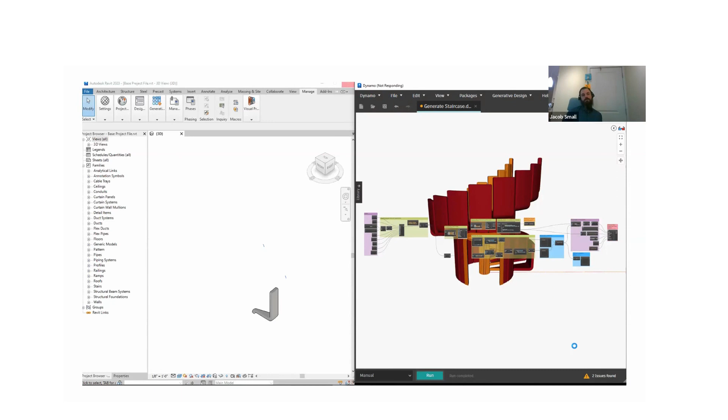All right, so last time on Dynamo Office Hours we built a crazy stair. This is an animation that holds the deck that basically shows how it was intended to work. You can see the graph over on the right—we set it up to drive all the math required to build all the different shapes and get the individual treads pushed over into Revit automatically.

I actually recorded this while filling up a cup of coffee, believe it or not. It was one of those things where you hit run, walk away, come back, and hopefully things are looking better—and in fact they were. So in this case, Jacob, you don't want to walk away because you get to see this awesome animation happening right in front of your eyes. That is true, that is true.

Now I will spill the beans a little bit—that was the 4th round at trying to get the animation centered. Yeah, I stopped watching after the 3rd one. Fair enough.

All right, so we have about 5 slides today. We're supposing a situation where the client enters in after we've done this really cool conceptual design and they change their mind a little, or a lot. The stair looks great, but what if we actually wanted to make the atrium twice the height and remove an entire floor? Or what if we wanted to do 2 full rotations just because it's cooler?

And while we're at it, why don't we start thinking a bit about detail? Maybe you want to add things like non-slip treads or surfaces, safety aspects like handrails so you can hold on to something, and at nighttime it's going to be hard to navigate without lighting, so maybe you also want sconce lighting inside the stair. So it looks perfect, but 3 pages of changes upcoming.

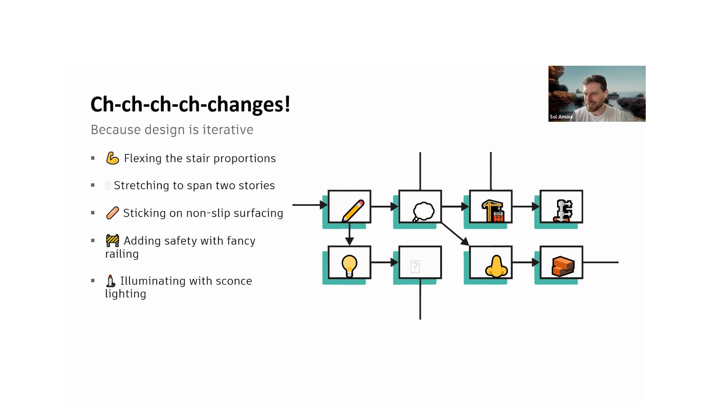So what we're going to do is go through the changes because design is iterative. We're going to talk about flexing the stair proportions, stretching it to span 2 stories, sticking on some non-slip surfacing, adding safety with fancy railing, and illuminating with sconce lighting.

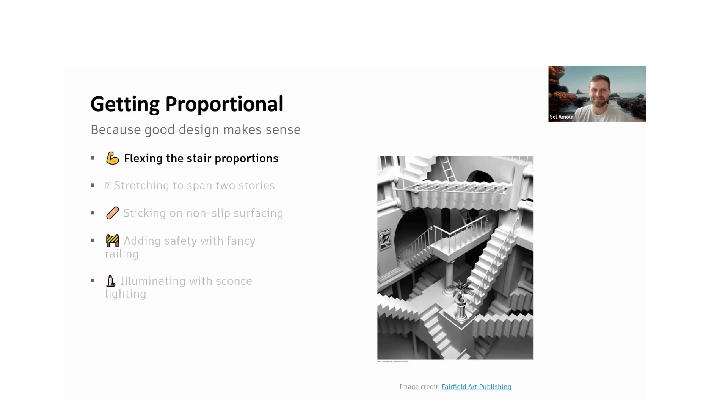We are also going to stretch it to span 2 stories—this is taking out that giant chunk of floor above the stair. Pretty straightforward on that one.

Ginny looks like she has her hand up, if you guys are willing to—yeah, of course, perfect. She should be able to. Ginny, you can come off mute if you want and ask your question if you have one.

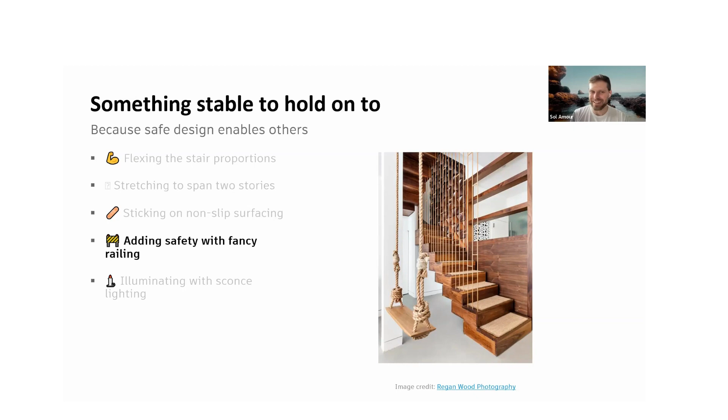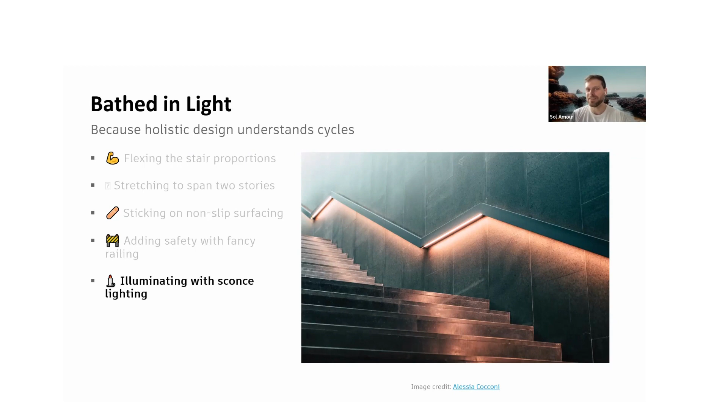And then the last one is around lighting - we need to put something around lighting, introducing into the space for this kind of dramatic effect. If we had had the chance to render it, which I don't think we quite did, maybe we'll show that next time.

All right, so that summarizes to where we got. So we're going to cue up the danger music, and it is more dangerous than usual this time out because we're really going to be pushing Dynamo to the limits.

As you can see, I am in a file with nothing up my sleeves. I don't even have a single generic model family type loaded in yet. We're going to go ahead and pop over to Dynamo, and I'm going to open the generate staircase graph that I'd set up before.

So some of this will look the same as what we saw before, but a lot of it won't. Even in the early aspects of the design, things started changing pretty quick. We've got some Python to cover, and a lot of work with topology to talk about. So lots of stuff going on.

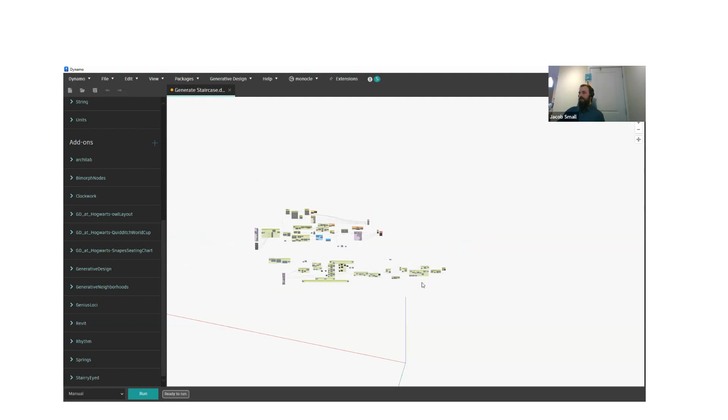You can see here, previously we had actually less than what we had up above happening, and now we have all this stuff down below happening as well, which is doubled, maybe more than doubled in size. Significantly larger, but part of the reason for that is previously we were leveraging custom nodes to move massive amounts of data and make use of list levels and lacing to ensure things are happening consistently. But we didn't really want to do that for this round of the demo, so we backed that out.

For now, we're going to talk about what things are happening here in terms of the changes. The first big change is we added some inputs for the handrails, as well as another input for the non-slip offset factor. And then one other input got added in for the treads and riser design, with the staircase rotation.

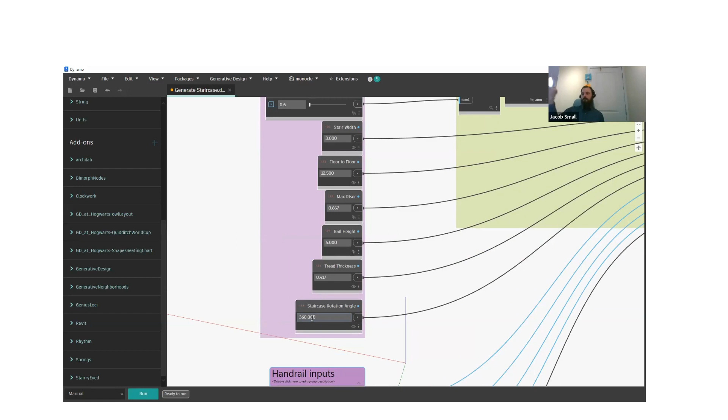Currently that's set to 360, so we're going to go the full loop, but we're going to try that up at 720 just to see what a double loop winds up looking like as well.

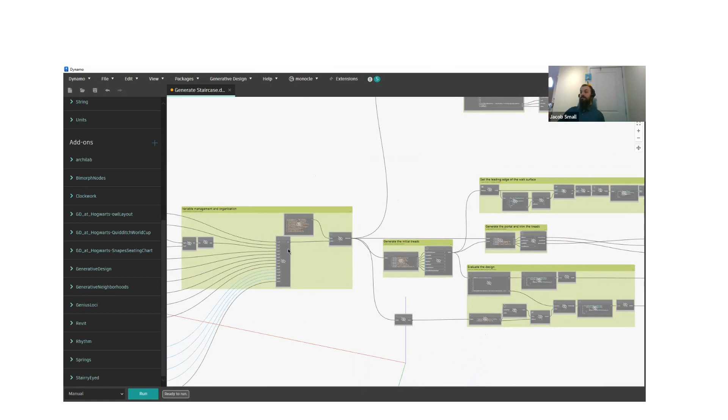To facilitate those changes, I did have to issue an update to the StairryEyed package, so you can get that up on Package Manager - it's called StairryEyed. It's got 2 nodes in it, Generate Treads and Generate Portal. Generate Treads now has the overall stair rotation angle.

We also made a change to Generate Portal. I updated to Revit 2023.1 about a week and a half ago, and there's a lot of great new geometry changes which enabled a lot of the cool new functionality we're going to talk about today. But it also meant an issue was introduced into this node, so I had to make a change to extrude a polycurve the other direction - a negative one got multiplied in a little bit earlier than before.

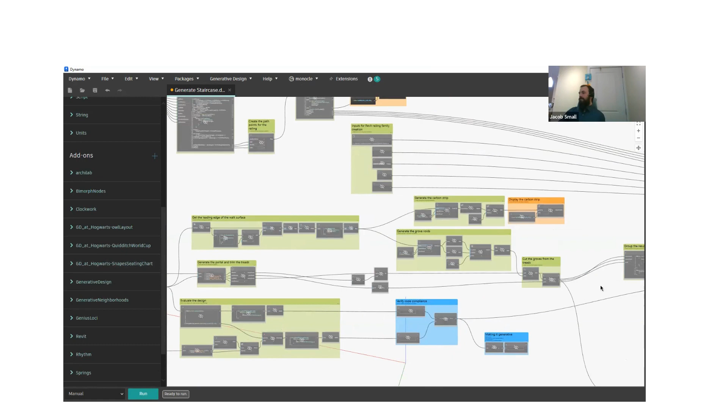In any case, it does work now for you whether you have the older or newer version. If you have the older version, you're probably going to need to work with the previous version of that package. So right off the bat, we'll go ahead and hit run - actually, before I do that, let me make sure I've got my gate closed, which is over here. That is closed. So we'll go ahead and hit run, just to have a look at what the stair looks like. And we can place bets in the chat to see if we're going to crash Revit today or not.

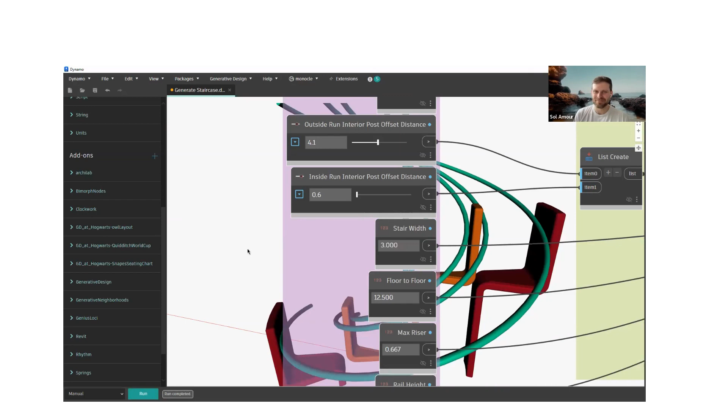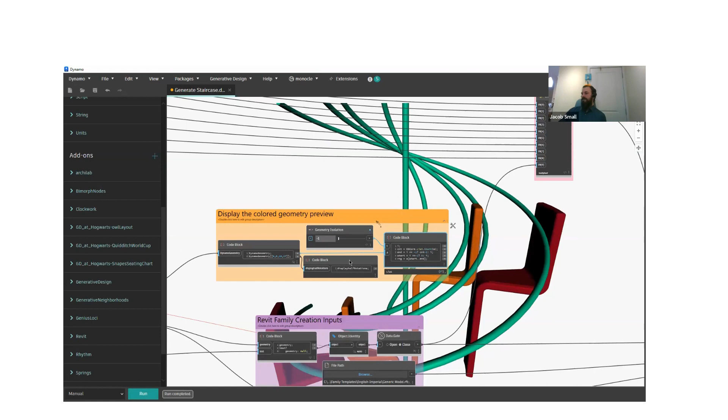All right, so we got some of the stuff that I wanted to show popping up there, but I have my wrong geometry display set up. So we're going to come over here and preview this and not preview that. All right, so you can see lots of new stuff has popped up here.

We're going to go over what all those changes are right now. Right off the bat, the first thing we talked about was changing the height. We wanted this to be 2 stories tall, right? So I'm going to come back here and look at my sliders, and we're going to find our floor to floor. Floor to floor is 12.5, and then we've got another 12.5 on top of that. Add those two up, and I think I get 25.

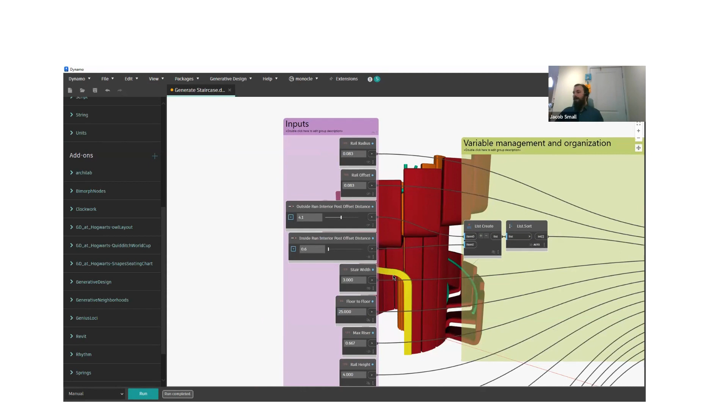So we'll go ahead and hit run with that. And now we should see twice as many stair treads generated, which will be pretty nice.

Now I do see something in the chat there from Thomas. Revit users have started to model stairs a lot as in-place families because the Revit out-of-the-box stairs are often limited in functionality. Was your stair creation method with Dynamo tested in office and transitioned to Revit, or do you think it's not suitable for normal Revit users?

So if I was to have this particular staircase in front of me as part of the design, and I was given the option of figuring out how to fight the Revit stair tools to get them to work and make these shapes, because it's maybe doable, but it would be really tough, I think I would go the route that I went.

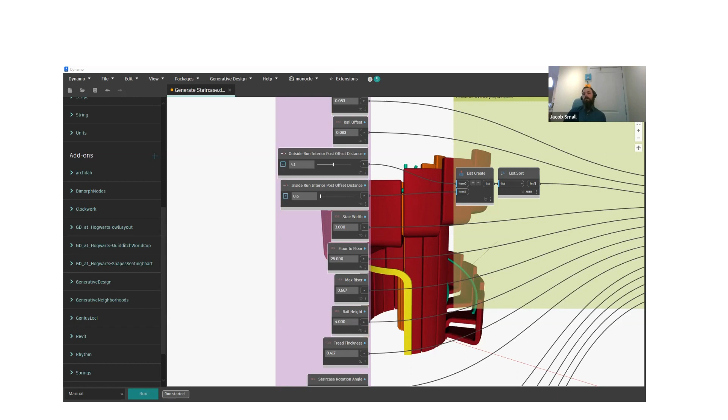And again, that's just because this is more of a sculptural element than your typical functional stair. Most functional stairs, and even a lot of sculptural stairs, can be modeled pretty effectively using the Revit stair tool, and it'll actually save you time, both in the initial setup and in the end result. But this one, yeah, that was going to take quite an amount of effort.

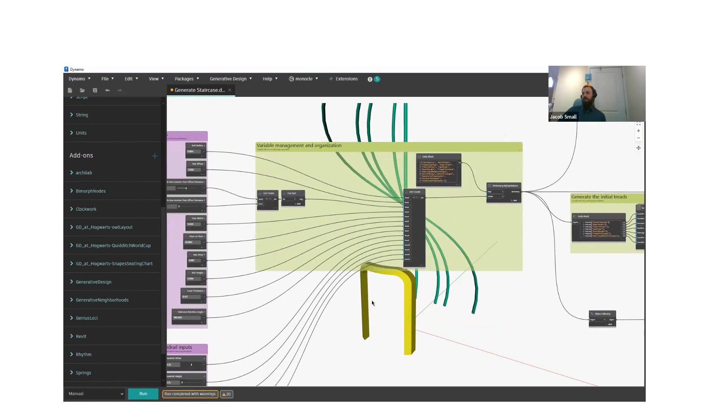Now we did get an error here, and I actually got it pretty early on with a bunch of nulls. The reason for that is we just can't make stair treads that narrow with that sort of size. So we're going to go ahead and change this value to 720, and then we'll hit run again, and then go back to speaking some more about the stairs.

So yeah, anytime I have any kind of detailed sculptural work, I tend to go to non-standard Revit modeling techniques, be it Revit API, be it Dynamo, or a combination of the two, which is actually what we have happening here. So we'll talk a little bit about both of those.

Like you can see the handrails there - those are not just direct shape by geometry, or family instance by geometry nodes, or family type by geometry nodes. I actually had to go in and do a good amount of Python work to get those to model correctly. So there's a lot of benefit to being able to do that, because it gives me a lot more flexibility than what I'd otherwise have, while simultaneously giving me a good amount of leeway in terms of the design processes.

So yeah, but to add on to that, Thomas, and anyone else who's curious - tools are tools, right? At the end of the day, the Revit stair tool is a tool, and if it does the job, great, use it by all means, because it's very good at what it does do. But if it doesn't quite model what you're looking for, in this case, a more organically shaped stair, then there are alternative pathways that you can take, such as Dynamo.

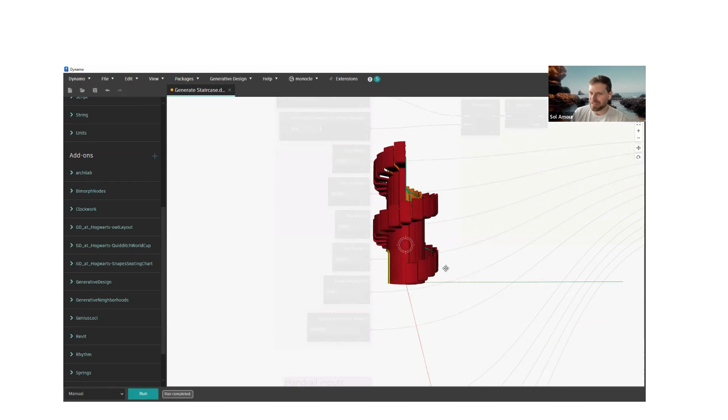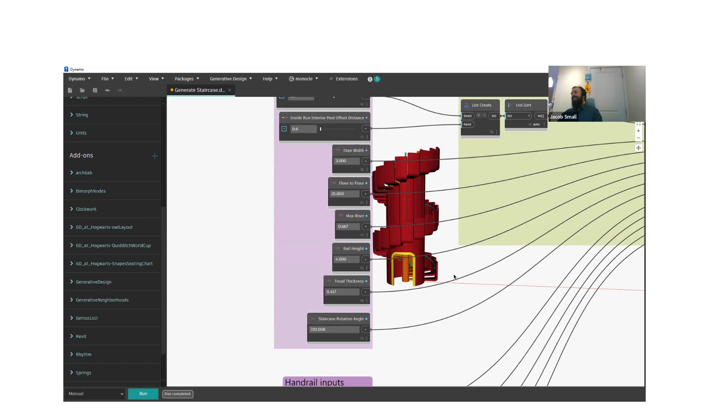So by expanding out that piece, I now have enough space to actually sweep those treads, and I can get that content all the way up there, so we can accommodate that double-story high staircase. This is starting to feel a little bit like something out of Swiss Family Robinson to me, where we've got the walk up around the edge of the treehouse, but it's still really cool looking.

The next bit of change to go over is the railings. There's a couple different ways you can start to add additional content on there. Railings was next, right? Yeah. All right, cool. I think technically it's non-slip surfacing, but it doesn't matter. All right, we'll do railings first.

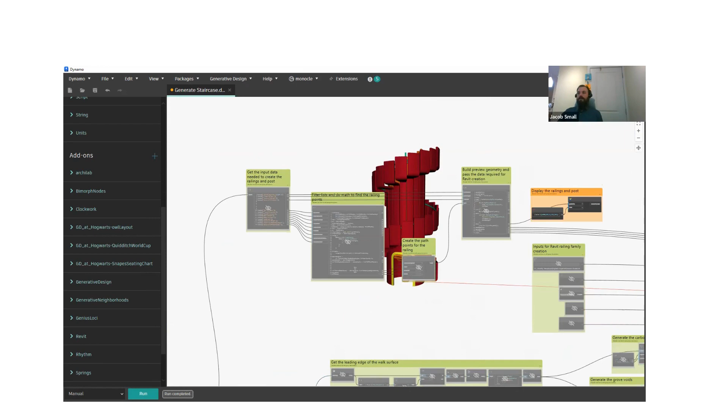So I pulled the information that I added into my dictionary before, and instead of trying to derive the curve I need for the railing from the model I already created with the individual treads, I said I'm just going to do the math, because this node is more or less a copy of what's happening inside this custom node. So I can copy paste that out and utilize a point by cylindrical coordinates, because I know the start angle for each point on my handrail, I know the heights for all of my handrail, which is my elevation, and I know the offsets from the center point of that cylindrical coordinate system.

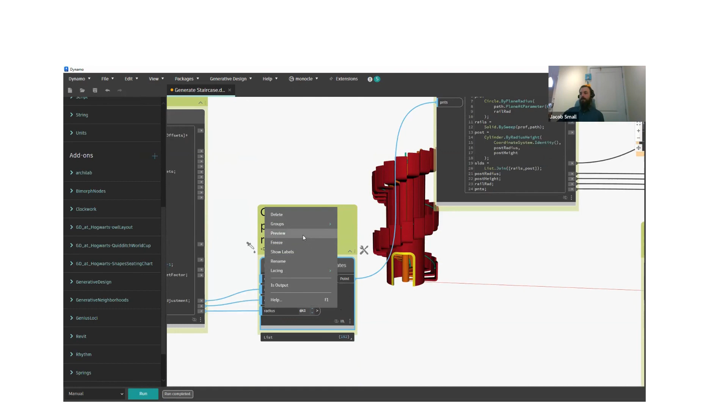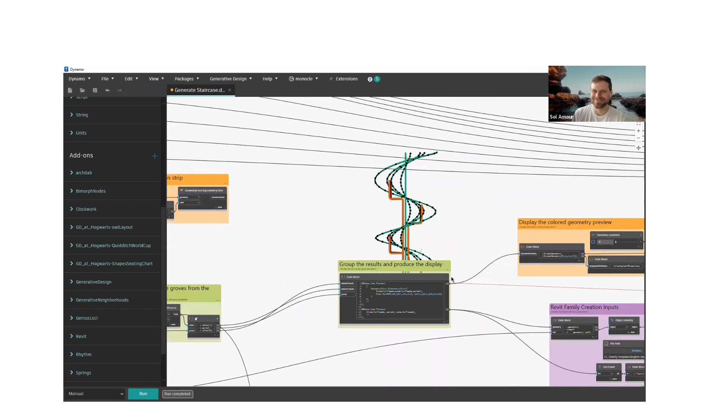So I can quickly march that all the way around and get a series of points. I'm going to turn off my geometry preview for most of the stair, but I do have that handy little debug tool that I built in last time. Here we are. Very cool node, the cylindrical coordinates one, and the spherical coordinates too. I think both underutilized, actually. Extremely underutilized, I would say.

So you can see here, I now have kind of exposed those two sets of treads. We're looking at just a couple treads on the inside of the stair. We're not looking at any of the outer treads, but you can hopefully imagine where they might sit. This gives me a good way to start to visualize this content. So from there...

With these points that I've created all the way through here, I can then start to draw some curves. I did go ahead and draw a NURBS curve by points here, and then a profile at the start of the NURBS curves based on a plane for the circle for the handrail, and then generated a solid by sweep and generated a post that sits in the middle.

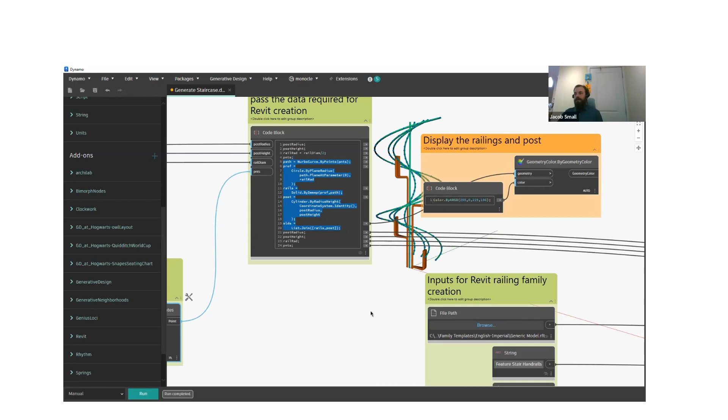So I had something to mount that interior post handrail to, and then made one list of solids from that. I don't need to do any of that though, because if I take that geometry, those solids, and bake them in as a direct shape, we get a whole bunch of nasty tessellation that happens as an alternative, which doesn't really look good and doesn't cut well. If you try to move it over as a family, an import inside of a family, the imports actually break quite often with these really twisty pieces where it's like, hey, it's a mesh, it's not an SAT, so I can't really import it as a solid. And so you're pretty limited.

So what I wound up doing instead is this bit of Python. We'll go over that when we get into the baking, but I'm going to double click on it to open it up so we can see kind of what the inner workings of this might be, assuming it doesn't want to crash on me. Of course, it's about 10 minutes in, there we go. So there's a pretty good amount of stuff happening here. We're working in multiple documents concurrently, right? We're up to 150 lines of code with all the annotations and everything. But it's some really useful stuff, and we'll get this posted up onto the community hub later.

All right, so that covers the creation of the geometry, color objects, and the railings. The next piece we wanted to talk about in terms of life safety is right underneath that. We had the anti-slip tread surface, right? And so the way that I built that was I took off the existing model.

So we generated those treads, and I quickly said, hey, from the tread, pull all the faces. I'm then going to take that face's surface geometry, the actual surface itself, not the reference to the part of the other geometry in the topology library. And I'm going to get the normal at the midpoint of that face. I'm going to pull the Z value of that, and check to see if that Z value is equal to 1.

Is this surface facing up? And if it is, then we want to keep that. If it's not, then we're going to filter it out. And then pull the first item in that list, which happens to be all of our treads.

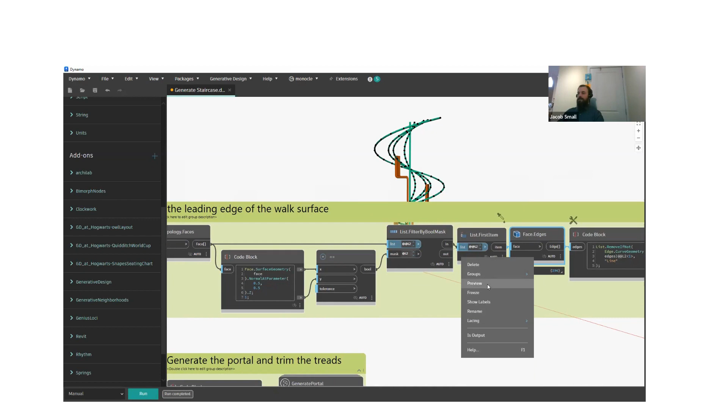So we can preview that, maybe. Oh, those are my edges. No, sorry, they're about that— edges, so they're invisible. Here we go. More edges, and then into lines.

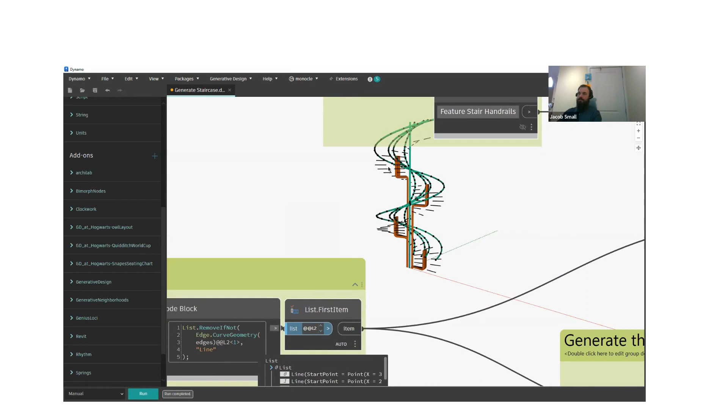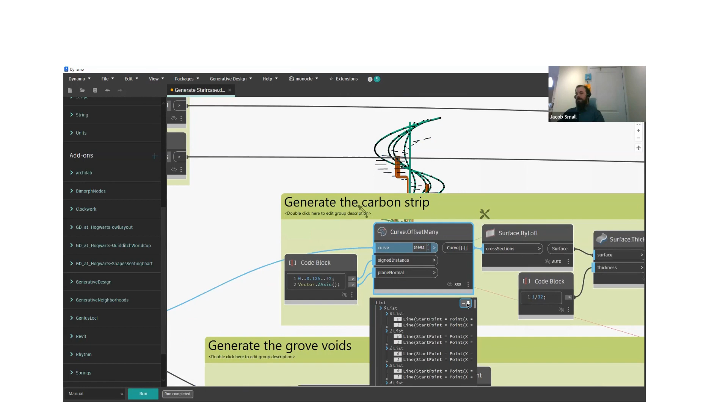So you can see I now have all the lines for the front edge of all of my treads, all the way up the stairs. With that content, I can then go ahead and offset, using the Curve.OffsetMany node, which is one of the new nodes in 2.16 - new to the Revit environment. Generate a surface by lofting between the individual pairs of curves, and then thicken that surface to get a solid, which looks like this.

I'm going to go ahead and turn off the previous line geometry. And you can see right there how that sits pretty well and clean on the front nosing of all the stairs. So we can start to embed the carbon strips and stuff like that.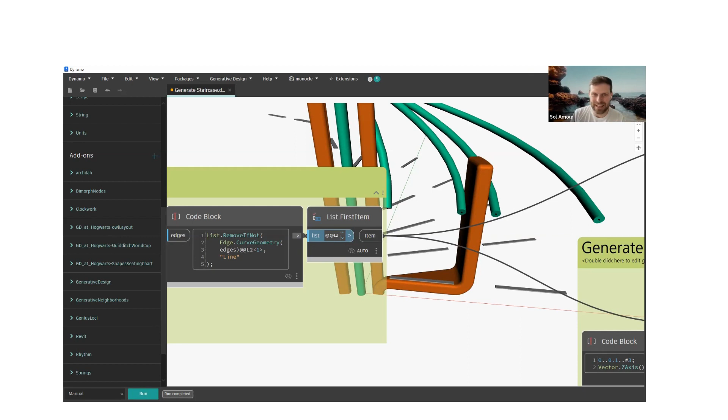There's a question from Thomas in the chat. He's saying, for example, the well hole in reality - talking about the stair tool - can be built smaller than the stair tool allows us to model it. It's just one example of many, so we're looking for additional methods of creating stairs in Revit. Also, glass stair balustrades are not possible without in-place family cheating. He also says he's not sure if Dynamo is the right tool for solving the stair problem, but for special case stairs like this, he thinks it's a valid method. I'm guessing that's more of a statement, Thomas, than a question.

Yeah, the stair tool, again, it's got lots of great uses, but it does have some limitations. Glass balustrades can be really difficult. I have done some pretty elaborate ones with the built-in Revit tools - it takes like a PhD in stairs. As noted last session, early on I became the stair guy because everybody else hated doing them. So, hey, it's a stair, give it to Jacob and he'll take care of it. And that's kind of where my on-the-job training came from on that. But you can make it work - it really does take a lot of specialty effort to push that content through, and that might not always be the right thing for the job. So when you can implement a solution like this to get the job done in a faster way, I'm definitely all for it.

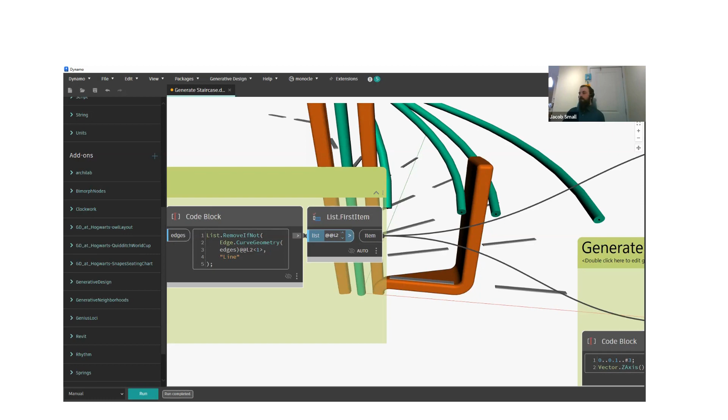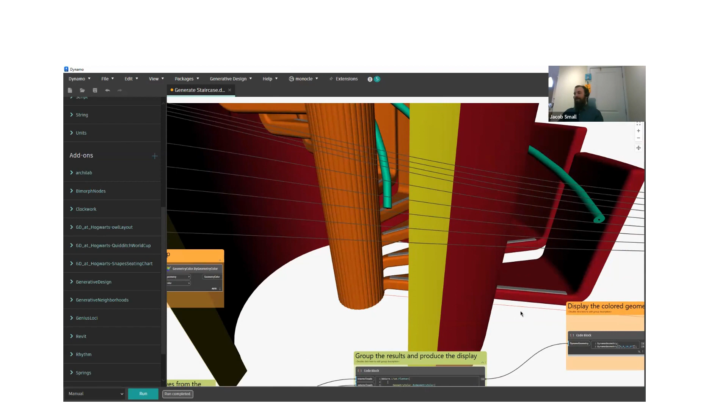All right, so now from here, we've managed to embed our carbon strips, but we talked to the client and they said, well, when I look at that in the context of the larger stair - so we'll turn on all our geometry preview - it's kind of ugly. I don't really want these metal strips built in there. What are our other options?

So Sol and I talked about it a little bit, and we said, what if we cut some grooves? So we're going to take the exact same leading edge of the walk surface that we pulled before, and then offset many curves. Instead of doing 0.125 twice, we're going to do 0.1 three times. And then we're going to pull the start point and the end point from each one of those, and draw a cylinder by points and radius.

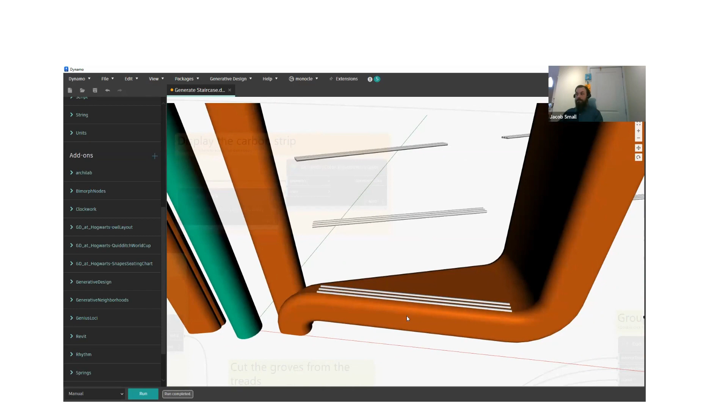So you can see what that looks like here. I'll turn that on, and I'm going to turn off the previous geometry preview up here. And we're going to try and zoom in to see a bit of the details. So you can see we've got a whole bunch of cylinders, again, lined up with the front nosing of my tread, because we're basing that off the actual geometry of the tread. We said, go ahead and pull this leading edge for every single one of those stairs.

Well, one nuance about this is because we have controlled the generation of this geometry in the first place, we know it's going to create itself in the same way every single time. The logic used to generate both the carbon strip and these grooves is done in a way that is specific to this approach, which means we know this geometry is always going to be generated the same way. Therefore, we can pull the topology in exactly the same way, because that flat piece of the surface of the tread itself is a surface.

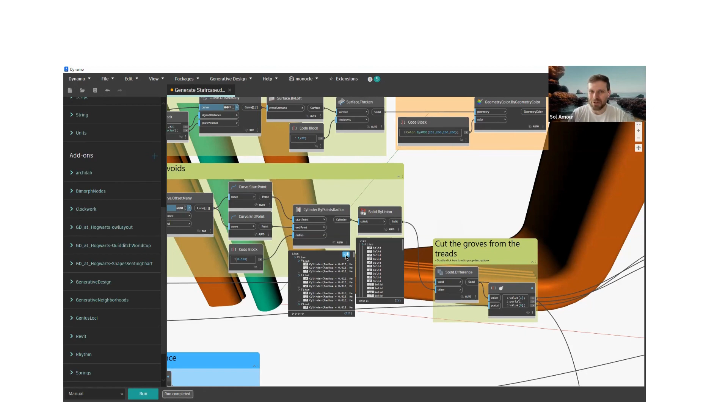When we destruct that surface and pull a curve from it, we always get the first curve as the front face of that surface every single time. If you're coming in with messy data or geometry, say from an exploded CAD drawing, you have to build some logic to pull the correct piece of geometry. So if you're generating something really complex like this, it behooves you to generate it from scratch yourself, because you can really control the process that way.

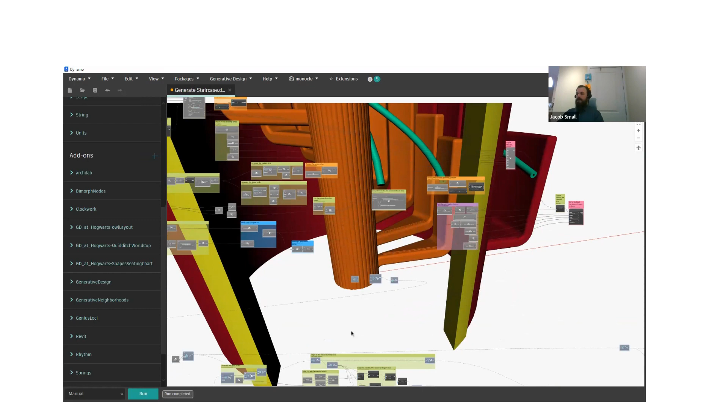So now from here, we've got the stuff happening down below, but we're going to get to that in a minute, because it talks a whole bunch about the logical way to find those leading edges and stuff like that.

Sol had a good transition queued up for me there. But before we do that, give me a minute.

Before we do that, I'm actually going to reduce this stair back down to the 360-degree 12.5. I know it works at that size, but as everyone can see with all the solid operations, all the filleting, and all the geometry manipulation happening here, it takes a really long time to rebuild all that stuff, and I want to make sure I have some degree of flexibility as we go through.

And hopefully not crash stuff as well. Zoom is also a resource hog on the machine.

All right, still waiting for this to strip out that geometry and give me my next section.

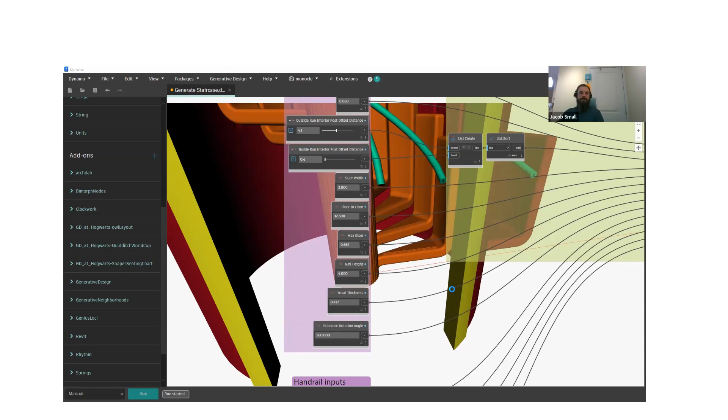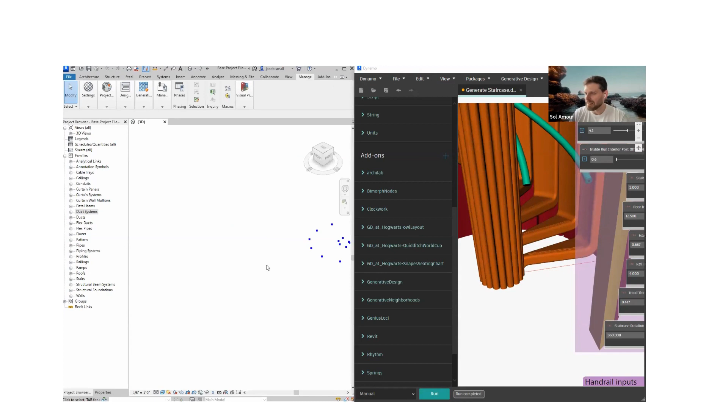So in the transition, is there anyone in the chat who has any questions about what you've seen before? Obviously there's some design script we didn't zoom into deeply, and some Python doing heavy lifting here, but conceptually it should be pretty straightforward. We're essentially generating a stair through some revolve methods, and starting to dissect that stair, or add to it, using very similar mathematical operations.

We're going to save that, close it, open that gate, and then hit go to see what happens when I don't have null data coming into that node.

So the first thing it's going to do is attempt to generate our handrail and center post. You can see it popped up there pretty quick, applied all the textures, and now it's going to start that lovely animation sequence. And I remembered to center it before I hit go this time.

Good job. Only took like 8 runs through before I had it rehearsed well enough. But now it's muscle memory.

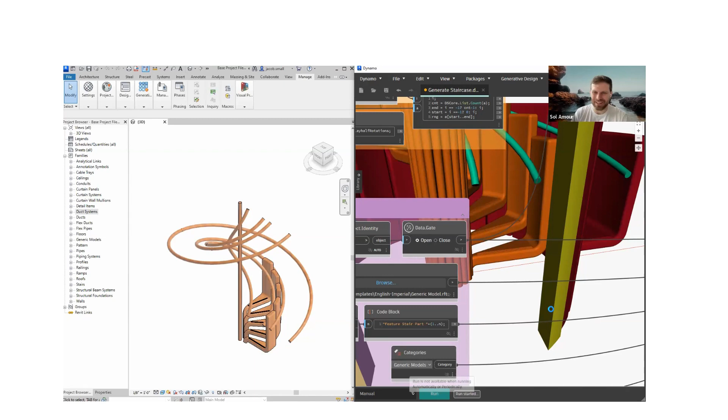Yeah, pretty much. So now it's going to go through and place all those, and you can see the grooves that we put in the treads are actually showing up in the treads themselves.

We've got the filleted edges around all those individual stair parts and pieces. If you're unsure how we got that original shape, I'd recommend checking out last week's session, because there's a good breakdown of how the logic works for building up a complex system like this. So we're just about done with the first interior loop and we'll start the exterior loop here.

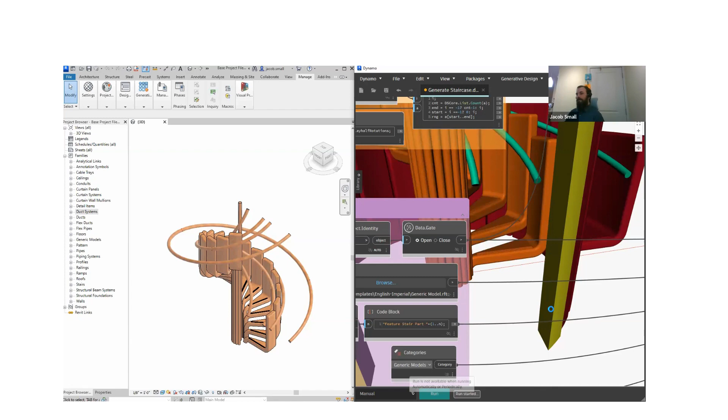I think I've got one more after this. Big shout out to Dimitar Venkov, author of the Springs package, for the really cool node that is doing a lot of this heavy lifting. Yes, the Springs package with family instance by geometry was actually a bit of an inspiration for some of the stuff I was doing in the nodes to produce the handrails.

We're going to pop that open and have a quick look at the big picture steps. I'm not going to get too into the weeds, but I want to walk stuff through because I know we got some people on the call who are pretty technical, and I want to make sure you guys can get a thing or two out of this as you continue to grow as Dynamo users.

All right, so 3/4 of the way through, and we're going to start to see the stair treads that are actually interrupted by the portal into the interior stair. The transfer beam. Yeah.

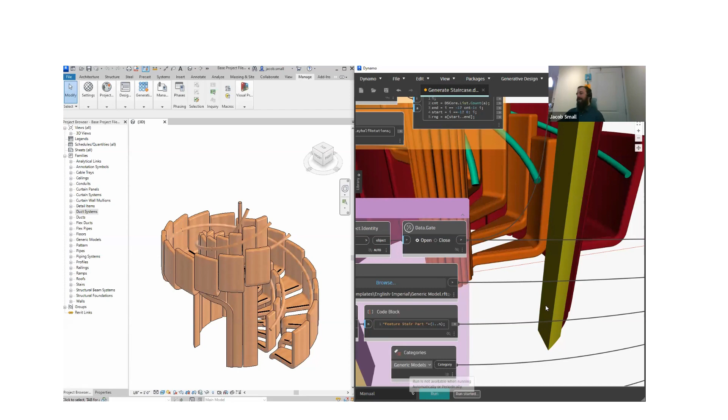Structural concerns certainly, but I think we can make this work. I think I've got one more that's going to generate, and then it's going to lock up and say, hey, I got to think for a minute because you just put a whole bunch of stuff, and it draws my Dynamo geometry. Now you can see these are the individual pieces.

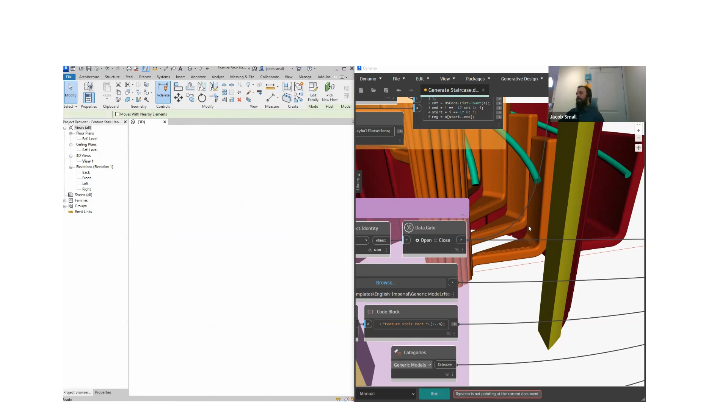I can go in and edit these families. They have an import instance in them because of the node that I used, but this one is a little bit different. So we're going to go ahead and have a look at the inner workings of this one, and do that in the context of Python.

Let me change the render mode to consistent colors here, so you can see this actual piece. It's not really the same as our other content, right?

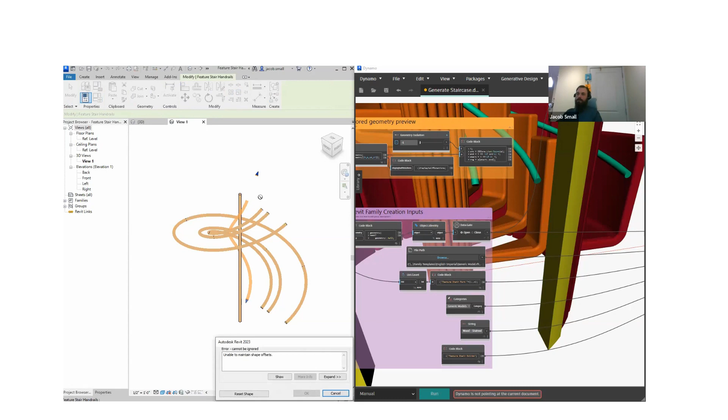I can actually start to adjust this stuff. I can't go too far beyond the end, but I can trim the content back, which is pretty nice. This is more editable than what we would get if I was to try and manipulate that with other means. I can go a little bit beyond on some of them, but not as beyond as I might like. I can adjust the cylinder as well. On the cylinder, I can even change the location, right? And all that stuff is fed from this one Python node.

So real quick, basically we do our standard imports, as well as the key piece here, which is making sure you've got Revit creation family item factory and Revit DB structure, right? These are the two different imports beyond the standard boilerplate.

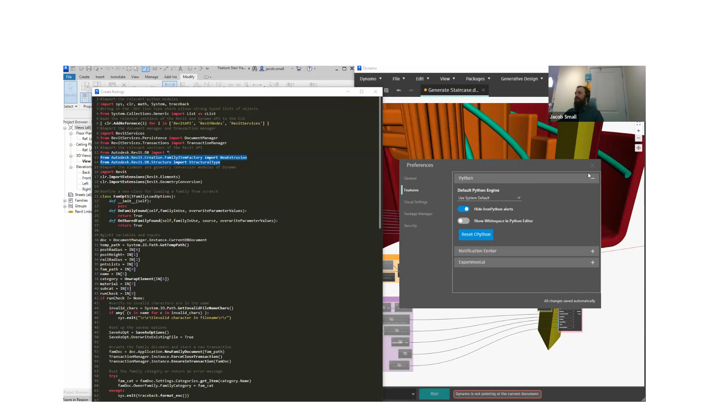Not sure what I double clicked on there to get that to pop up at that point, but here we are. So standard module imports, other than the structural type being a little bit unique, as well as the family creation family item factory library. Beyond that, most of these are going to look pretty similar to everybody who's familiar with Python and Dynamo for Revit.

After that, we define a sort of interface for family load options, which is basically going to say, hey, if it pops up a problem, this is what I want you to do. So basically it's saying if there's a family found, we're going to go ahead and set overwrite parameter values to true. If a shared family is found, we're going to go ahead and set overwrite parameter values to true as well.

After that, we get into our standard inputs. So we've got our document inputs, our temp path, post radius, height, etc., for all the different imports into Python. The key piece here is we do a quick check to see if there's any invalid characters in the file path. This is a shout out to Dimitar and the Springs package.

From there, we pull open our save as options to make sure we can save the content, create the new family document. So we're not actively working in our doc, we're working in the family doc for most of this. Force close any transactions we have open, start a new one in the family document, not the document. Try and set the category, and if that fails, let us know.

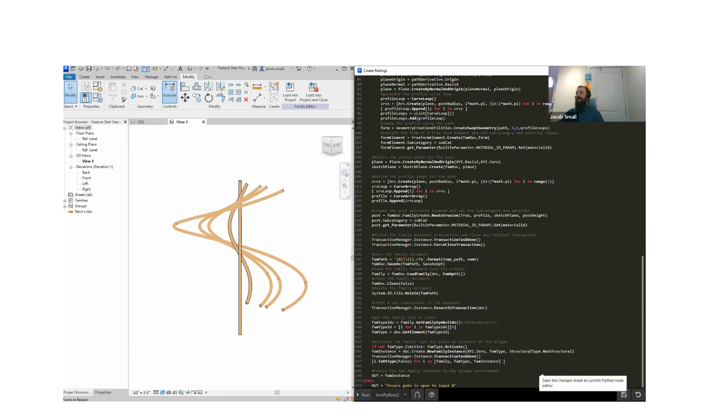We'll close out all the transactions, save our family, load our family into our actual document, close our family, delete the temp file that we saved the family to, make sure all our transactions are closed, make a new family instance, and then output that. And that's how we get this sort of editable file that you can see over there, which is pretty cool.

All right, so I'm going to go ahead and close that.

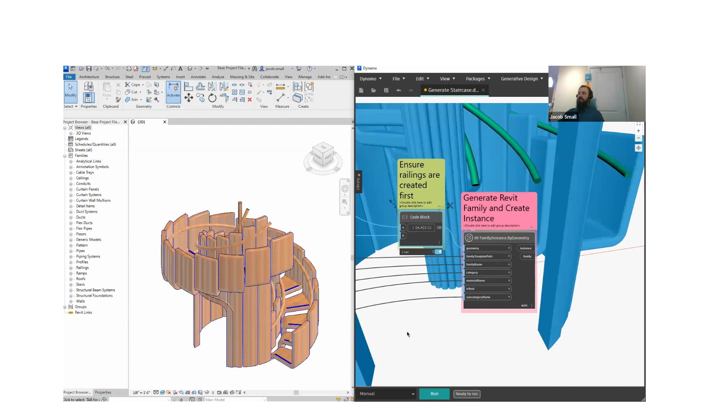All right, so now the next piece was this node. We didn't really make any changes, except I made sure that I passed my handrail through before I actually started my family instance by geometry.

Looking at the time, we've got 15 minutes left. So it's not enough to get all the way through this. I was trying to go quick, but I didn't go quick enough, I guess.

But let's talk about how I would go about putting the lights, because I think that's the last thing on the list, right, Sol? The lights. We covered the treads, we covered the rails, we flexed the stair. Yep, all right, lights are the last one.

Cool. So to do the lights, we wanted kind of a recessed light inside every third-ish one of our treads. We wanted it mounted kind of on the inside wall.

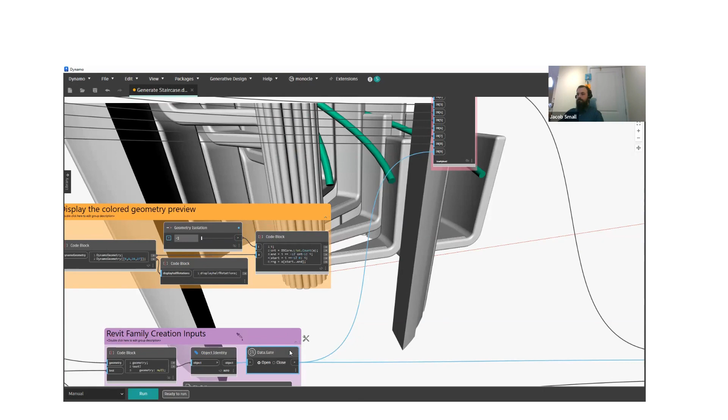I'm going to turn off most of my preview. We're going to go to kind of our detailed preview only, and we're going to focus in on the Dynamo side. I also have to turn this off. Nope, that's the wrong one. This off?

You know, you can select it in the background preview. I could have selected that in the background preview. That's a great shout out. So to do that, we just switch to the background preview, click, and come back here, and then it highlights the node that's actually displayed, which is pretty cool. And if you use Control-0, you can zoom to fit on those things. Also true, also true, keyboard shortcuts are great.

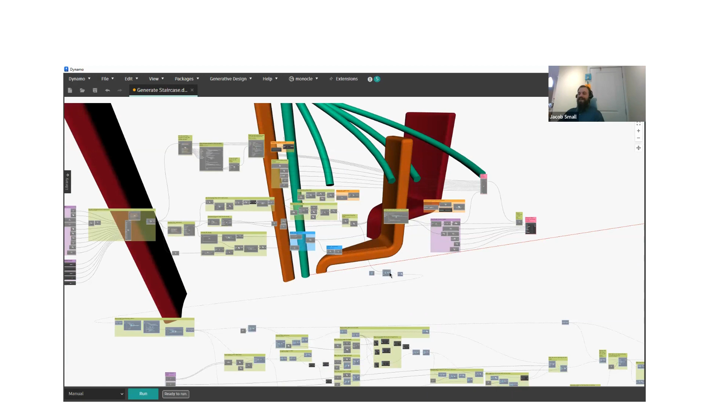So the way this works is we're going to start by taking all the treads that we made for our interior and exterior treads, and those are kind of a nested sublist, one for the interior and one for all the exterior. Then I'm going to take each one of those sublists, and we're going to unfreeze this, and I'm going to take every third item. So I'm going to go ahead and run this now.

Spoiler alert, this one can take a little bit long to get through.

Thomas asked how much a modern graphics card helps display background geometry and nodes in Dynamo. He ordered a new NVIDIA for video add-ons and things. Sol, do you have any ideas on that?

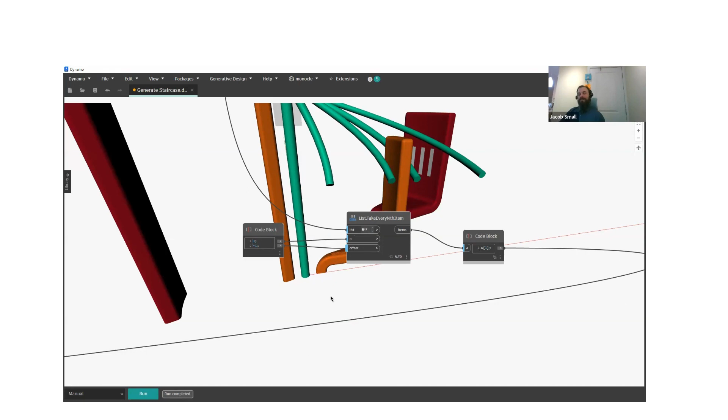All I know is you have to have one, otherwise you might not have geometry preview, but I haven't really tested that. The short answer is the better hardware specs you have, the faster things are going to be. That's just the nature of how things work. But Thomas, I couldn't specifically answer what difference that makes for your specific hardware.

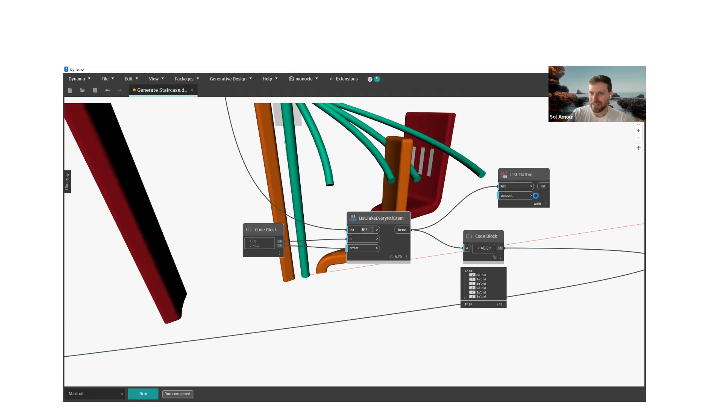What you'll notice sometimes is Dynamo actually finishes executing things before the rendering kicks into place. You might have a delay of a half second or a second, so the rendering is actually quite resource intensive. I'd be curious, Thomas, if you'd loop back with us and tell us, for some relatively complex thing you're doing in Dynamo, whether the rendering is faster with your new hardware. Be really curious for that one.

Great answer, Sol, as always.

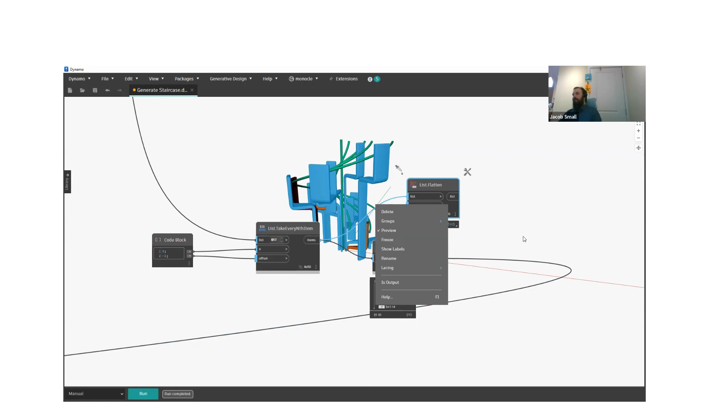All right, so now you can see I've taken every third from the interior and exterior curve loop, and we're just working with those overall solids. I'm only passing this one for now, just in the interest of time, but if we've got time at the end, I'll go ahead and feed them all through.

Panning down and over here, we're going to pull the individual faces, and then start to filter out those faces based on mathematical properties about the faces. Because I know my stair, I can make those decisions based on what they are.

First thing I'm going to do is say, from the face, get the surface geometry and find the normal. Make sure the Z value of that normal, rounded to 6 digits, is equal to 0. This gets me every vertical face, meaning perpendicular to the face is always level to ground.

Right? That actually edits out a lot of stuff. I had 306 faces before. I'm down to 120, so about two-thirds of the faces instantly eliminated, which is pretty cool.

From there, I take the top. Jacob, one quick shout out: this is a really efficient operation when you're talking about using topology and abstract geometry. You're getting normals at parameters rather than putting a point at a parameter and querying that point's location in space. It's actually going to execute much faster when we do that. Yeah, great catch.

Next piece, because I do need to work with points to some extent since they define the location in the 3D extents, I do it a little differently. For each one of my geometries, I'm going to pull a bounding box, so I don't need to worry about querying the geometry of the surface to find an actual parameter. I'm just going to say, about where are you volumetrically within the model?

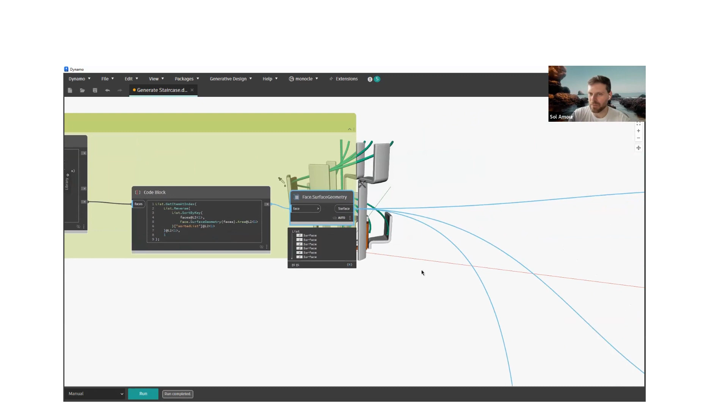Another thing to bear in mind is that because Jacob's doing this in code blocks, it's actually quite efficient from a memory perspective, because every node holds on to all geometry that is in it, and that's by design, so you can interrogate the geometry and build graphs that branch and have multiple wires coming out of a single node. But it's more efficient, once you've fully finished that process, to start wrapping things up into either Design Script or other processes such as custom nodes, so they don't hold on to that geometry and just pass through the end result.

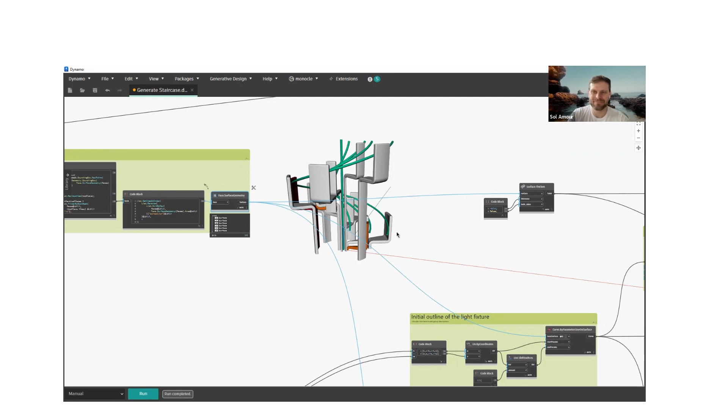Nice. All right, so now we're going to take our face geometry and thicken it to get a solid up here, and that's going to be effectively the volume I'm cutting things out of. We're going to turn off this geometry because I don't want to see it anymore. You can see this is just the volume in which I'm going to be hosting all my lights. We know where that face is because we've got it here, and we've got a solid we can work with as well.

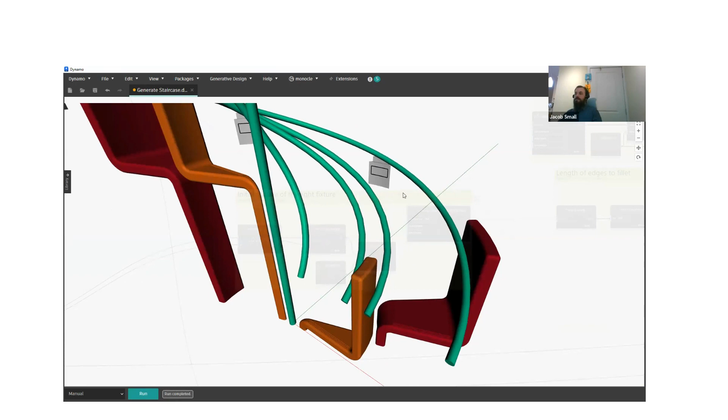And then from there we start to just use UV coordinates to draw little rectangles on our surface, right, and you can see what those look like. Because I'm using parameterization, it doesn't matter if I'm drawing on the inside or the outside—these pieces are going to sort of geometrically expand as needed.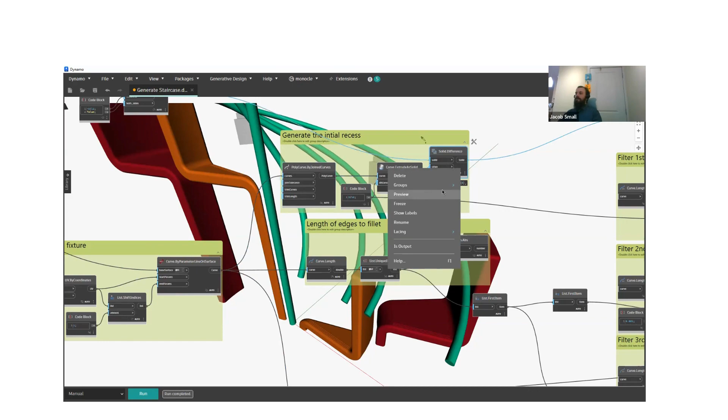I'm going to turn the previews on and go real quick because I know I'm down to the last 5 minutes here. I'm then going to go ahead and thicken that polycurve, or create a polycurve from the curve loop that I built, extrude it as a solid, and then subtract it from the other piece, which is going to give me kind of the hollowed-out individual shape.

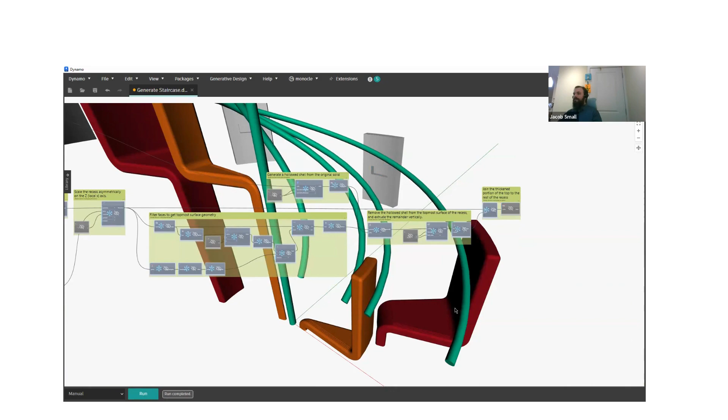I have to go all the way over to the end to disable this bit of geometry preview—bear with me. So you can see I now have kind of the divot taken out of my solid for the overall piece.

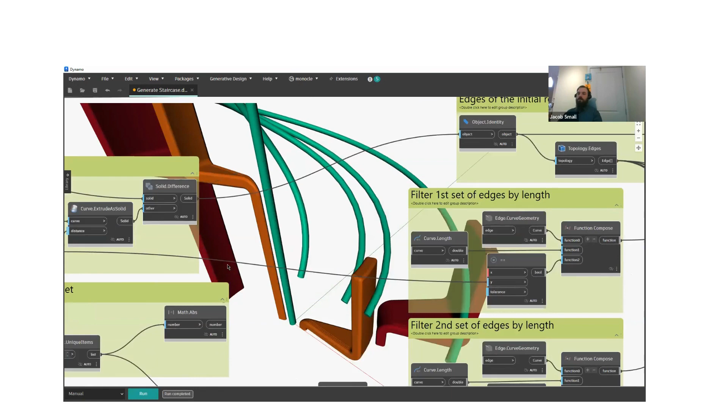We're then going to go back to these curves, get the length of the curves, get the unique items, pull the absolute value of that, get the first item from that list of pairs and the last item of that list of pairs, and take our depth that we extruded. The reason I'm doing all that is I'm going to build a function that takes the curve geometry of an edge, gets the length of that curve geometry, and asks if that length is equal to this length, the first length of my extruded edges, or the second length of my extruded edges.

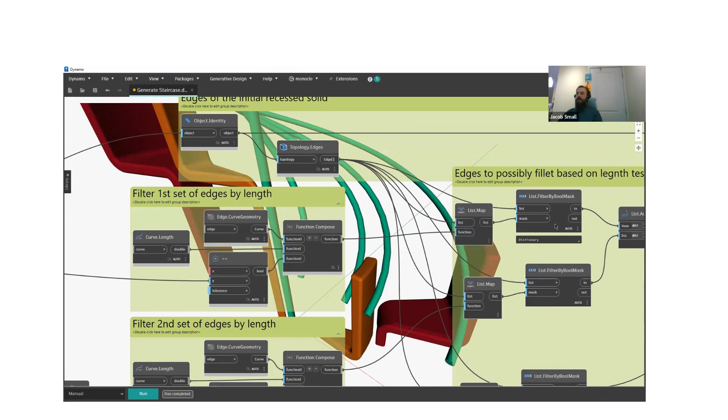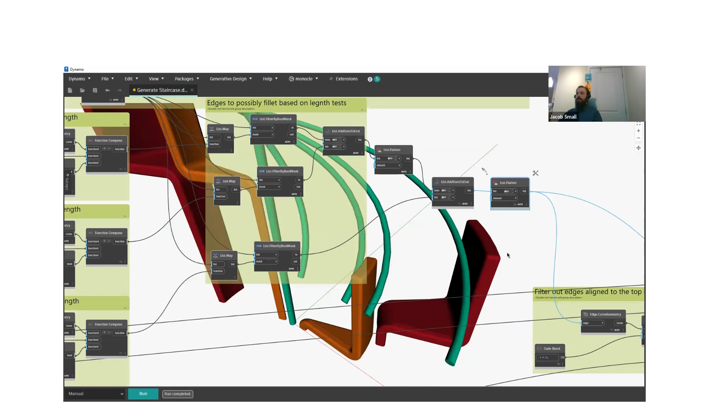And then filter out my edges based on that. So again, I had 144 options here. After that I'm down to 48, right—actually a little bit more than that, it's 72 edges that I get down to. So again, just working with the properties of my edges to quickly filter stuff down and not put a bunch of geometry in when I don't have to.

From there, we're going to make sure all the edges at the top edge of our recess are filtered out. So we take the curve geometry, find the point at parameter for the dead center of my curve, get the z value of that, and say is this center of my curve less than the top of my bounding box for the individual recess I'm mounting my light into. With that data, we're going to filter out intersections by whether they touch the host face or not.

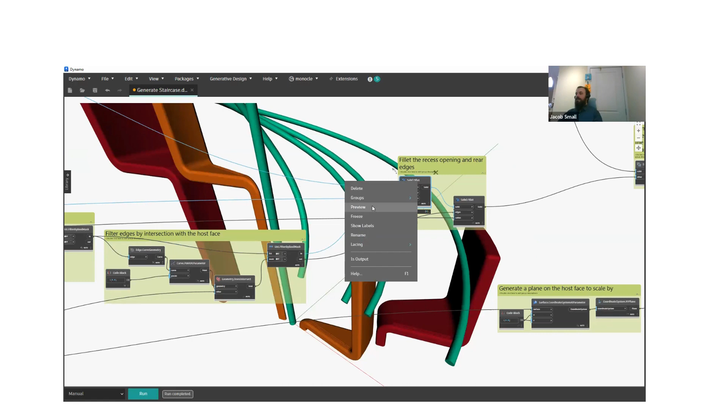The reason for that is I want to be able to fillet my host face differently than my back face. So you can see I've filleted that edge by 2 inches—we talked about the fillet node in the last session. Then after I do the front face, I'm going to go ahead and fillet the back one, and that gets us a pretty unique looking shape. You can see I've got kind of the swoop in both plan and elevation on the front, but nothing up top. We'll hide both of these.

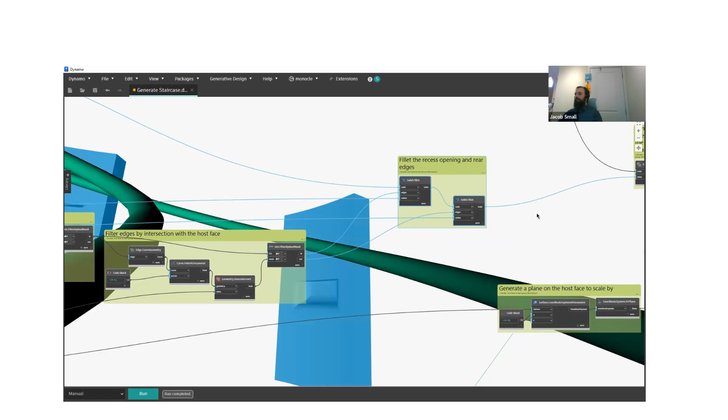From there, we're going to take our solids and difference them from our overall solid. So instead of the really big piece, that gets us down to just the little inset void, if you will.

And then I'm going to scale that up asymmetrically about the z-axis. I'm using the z-axis here because this is scaling by a plane that I pulled from my original surface. So now that is also a little bit taller and a little bit more irregular of a curve.

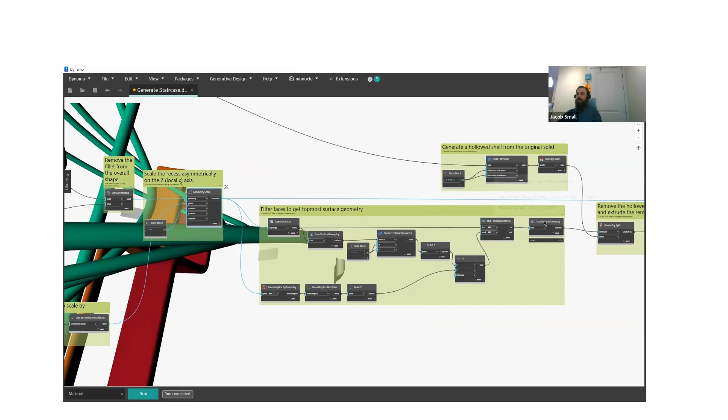And again, that plane was pulled from the coordinate system on my original host face that I picked out from the topology filtering. From there, we're going to filter out to get just our topmost piece of geometry, take that, split it by a thin shell. Thin shell basically says make our exterior wall a little bit further outside, our interior wall a little bit further inside, do that for all faces of my solid.

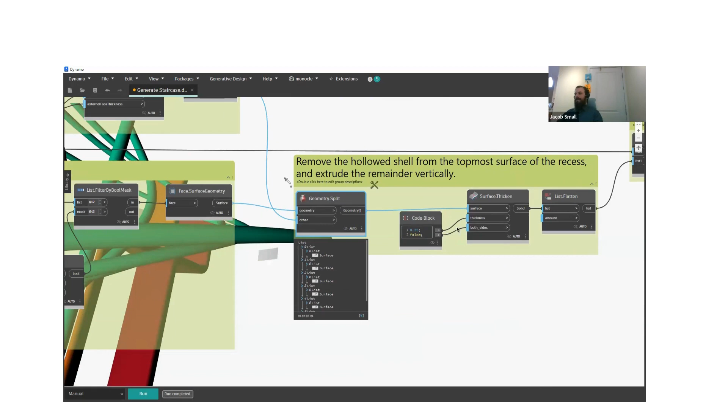And I get kind of an opening in the middle of my solid. I can take that, union it into one, and then intersect that with all the individual solids that I had for my inside piece, which is going to get me a surface right up there.

That I can now flatten and join with my previous geometry. So that's this face. Somewhere back here, I forgot to turn off a geometry display, maybe this one.

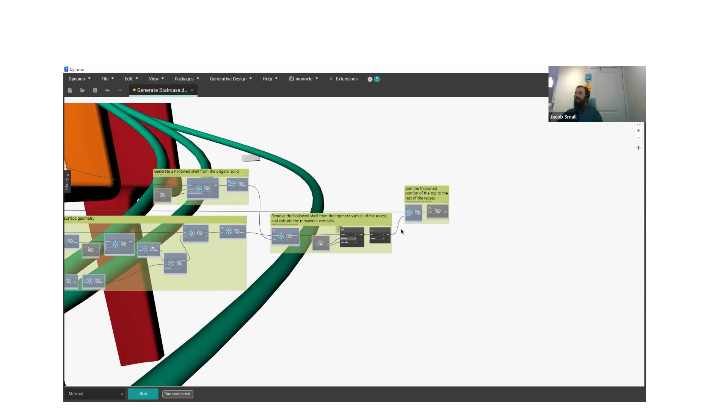I can intersect that with the extruded geometry to get that shape. So now I've got a void shape that has that curve in section, the curve in plan, and a nook into which I can hide my light bulb.

And so that solid can then be unioned from the individual sublists. And then I can go a step further than that, not that I have time, but I could take that solid and subtract it from my larger stairs, and that's going to give me something solid that I could bake back into Revit with that void.

And now as a next step, I can host a light fixture that just consists of a light bulb or whatever my light fixture might be from the lighting engineer, to go ahead and do that down throw to get the light down on the stair.

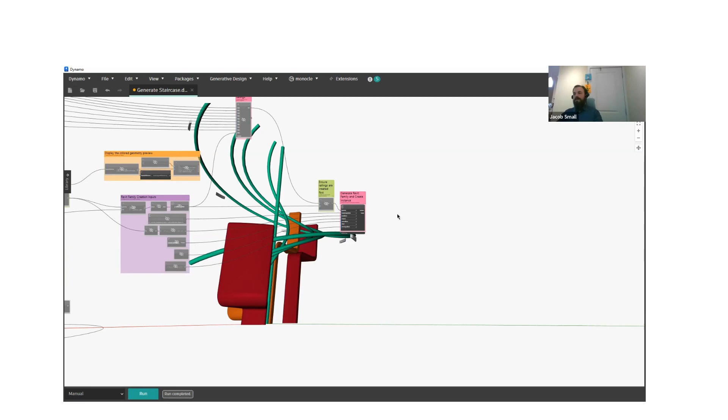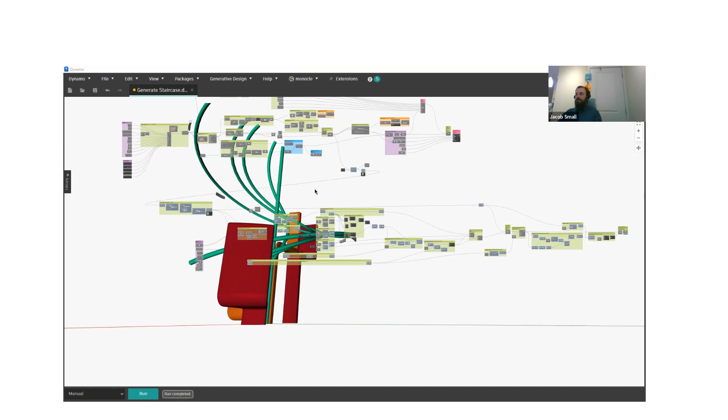All right, so yeah, that was everything. Hopefully you guys got something out of it. Again, I was touching on as many crazy aspects of topology and abstract geometry as I could, and tried to stick with nodes and the canvas as opposed to custom nodes. It would have been much easier to build if I'd leveraged custom nodes, but I wanted to make sure we had something that we could point at and start to take apart.

Okay, writing the stair story. We want to take the next step in this process and do things with documentation inside of Revit. So leveraging the API to try and automate as much as we can around documentation, which may or may not use the stair depending on whether or not we can host dimensions to it.

And then we are still looking for a couple of special guests, but we will get there for packages of note—packages internal to Autodesk that are really useful that you should probably be aware of. Most of you hopefully are. And then going with the flow, which is the start of a 3-part Civil 3D series talking about pipes. Many more awesome things to come.